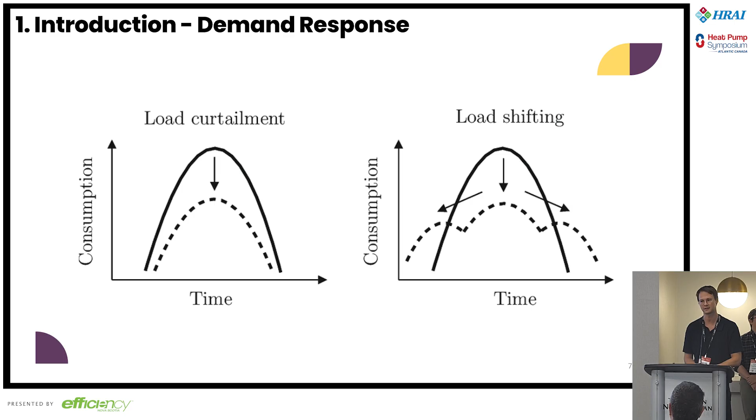So why do we care? There's essentially three key benefits here. So the first is stability of the grid. So by balancing energy supply and demand, it allows essentially the utility to better manage the strain that peak demand applies and manage any sort of power outages. And then as well, the second key benefit is around cost savings. So this is both for the utility as well as the energy user. So essentially, during times of peak demand, it's very expensive for, for example, a utility to install new infrastructure to meet that increasing demand.

And usually through incentives or time-varying rate programs, which we'll go into in just a minute, participants that participate in these demand response programs can receive an incentive and get some cost savings there.

And then finally, in terms of greenhouse gas reduction, many utilities have to rely on fossil fuel power plants to meet these peak demands. So by participating in a demand response program, whether that's industrial, commercial, or residential, we're reducing the reliance on those plants. And as we continue to see increasing electrification, demand response programs are a really effective way to manage that increase in electricity demand on the grid.

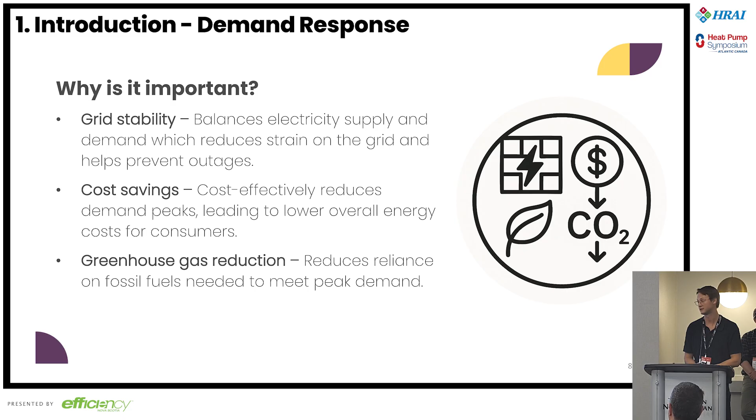So here you can see a pretty typical demand response program timeline in terms of steps. So, an energy user would sign up for a DR program. This could be industrial, commercial, residential. The demand surges, and in our case here in Nova Scotia, we're a winter peaking jurisdiction. So you'd see these peaks in the wintertime, mostly due to heating loads.

Next, your participant would reduce or shift their load, by means of one of the many technologies that we'll demonstrate soon, but essentially you're looking at smart thermostats, EVs, home batteries, and I think that's pretty much it. There might be one more that I'm forgetting.

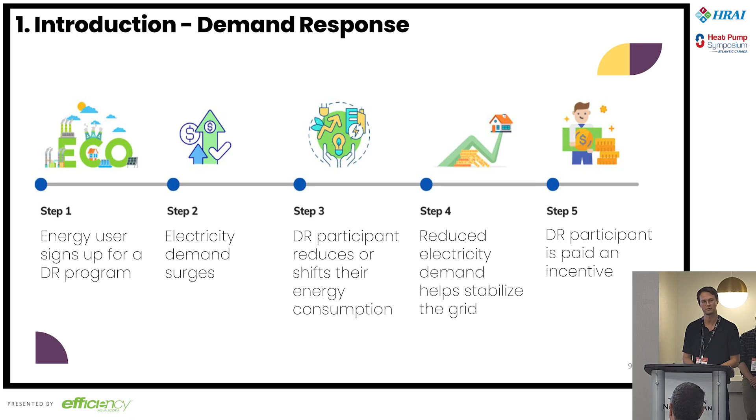And then the next step is you're reducing your electricity demand. These demand response participants are reducing their demand, which helps stabilize the grid. And then finally, your participant gains a profit either through an incentive or donuts or toilet paper in some cases.

So during that time, it's kind of like the stick method in a carrot and stick model where you're penalizing an electricity user for using a lot of demand during that time, but then you get a better rate during the rest of the day and actually in the summertime as well. So that's one type of demand response program.

And then shortly here, we'll dive into EcoShift, which is Efficiency One's demand response program, where a participant would receive an enrollment incentive. So just by signing up a device, they would receive a small incentive. And then again, by participating in the events during the season, they would receive some more money at the end of the season.

So, to give a quick overview of EcoShift, it runs from the beginning of December to the end of February. The events are called by Nova Scotia Power, so they can forecast when that peak demand is coming, and we give the participants a day-ahead notification that this event is coming.

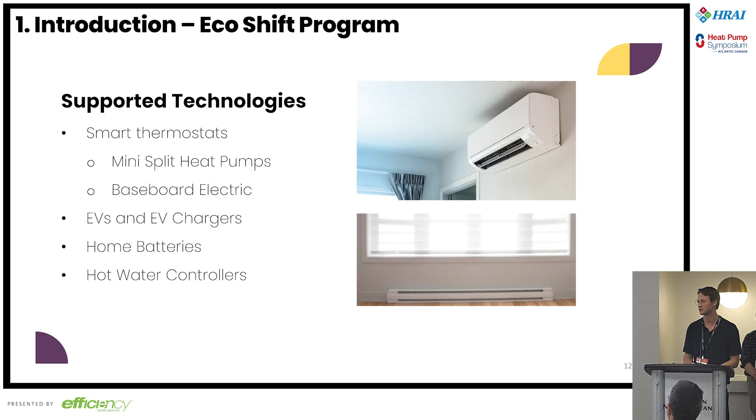So in terms of when a DR event is called, how does the load reduce or shift? How are we performing demand response? There's a few different ways. We'll focus primarily on the smart thermostats here. So to maintain comfort, often we'll do a preheat 30 minutes before the event starts. And then the temperature set point will be reduced by up to 2 degrees Celsius.

For some of these other technologies, you can see, for EVs, you're pausing charging as long as the battery state of charge is above 50%. EV chargers, there's not a lot of those in the program yet, but they basically recharge at a reduced rate. And then for home batteries, you're discharging, usually to the home or potentially back to the grid if it's net metered.

And then for hot water controllers, there's a system where essentially the homeowner won't detect any loss of hot water, and you're essentially curtailing or reducing the power draw during the demand response event.

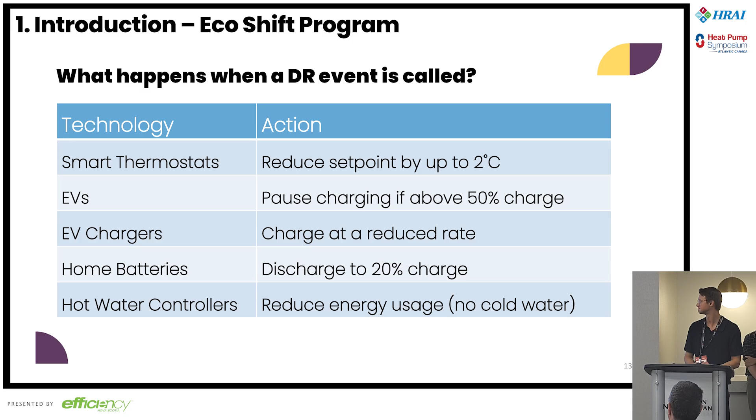So I'll pass it over at this point to Sarah to talk about the high-level outcomes.

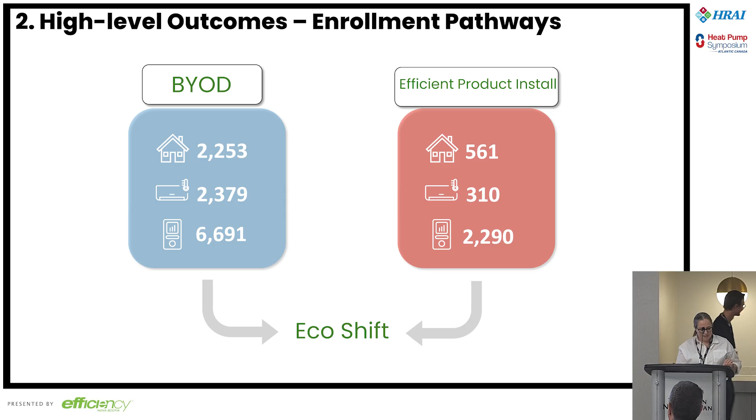Okay, so where do our participants come from? The first thing I want to mention is that these numbers are as of the end of our second season, so that would be the end of February of this year. We have quite a few more devices that have enrolled in the program since then. I think we're at almost 16,000 devices in total. So keep that in mind when we look at the numbers.

There are two different routes that people can join the program. There's the bring your own device path, where people already own those devices. We're talking thermostats specifically right now, but either they own their own devices or they've purchased them recently and they want to enroll the device to take advantage of the incentive that they're getting for enrollment in the program. As of the end of February, participants in that second season, we have around 2,000 people who came in through that bring your own device route. Just the similar count in heat pump controllers and thermostats that were controlling heat pumps, and 6,600 baseboard thermostats.

The other route that people can come in is via the EPI, or Efficient Product Installation Program. That's a program that is also delivered or offered by Efficiency Nova Scotia. For that program, they have been installing thermostats for quite some time for the purposes of EcoShift. As of, I believe, the fall of 2024, they began a requirement that those people who are receiving the heat pump controllers or the baseboard thermostats would also need to enroll in this program.

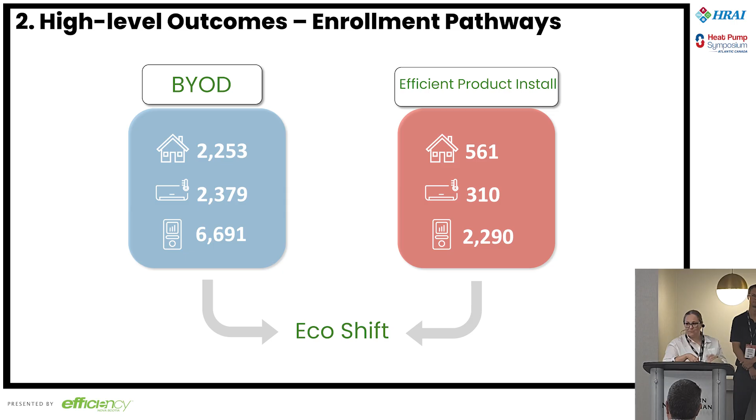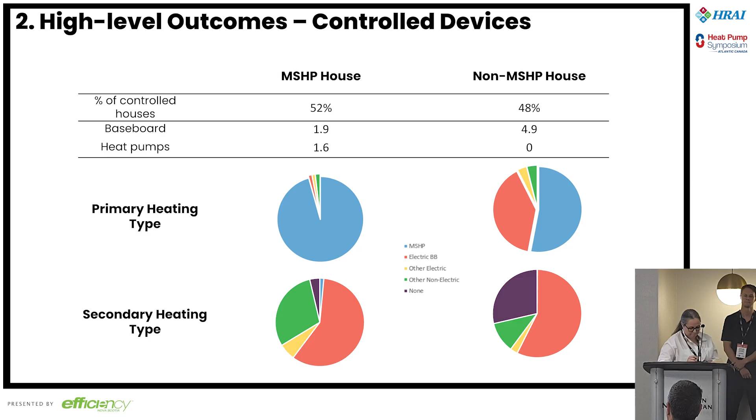All right, I'll pass it over to Ryan. All right.

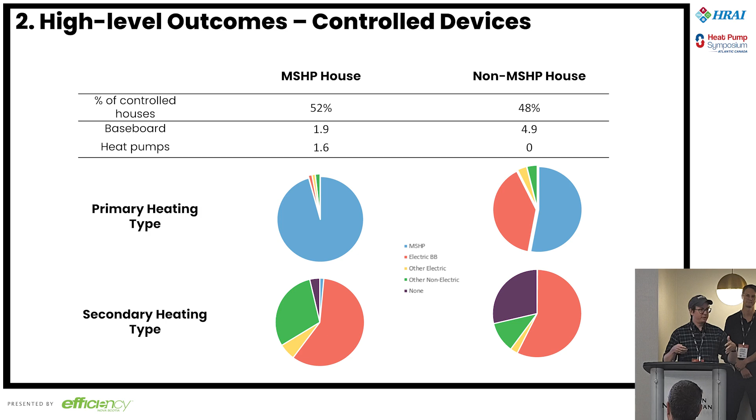So if Sarah gave a high-level overview, literally looking at the province and where everyone is, I want to zoom in, go very low level, pick out a few examples. It's not going to be a statistically representative sample, but I find it's helpful to look under the hood and kind of understand what's going on at that level.

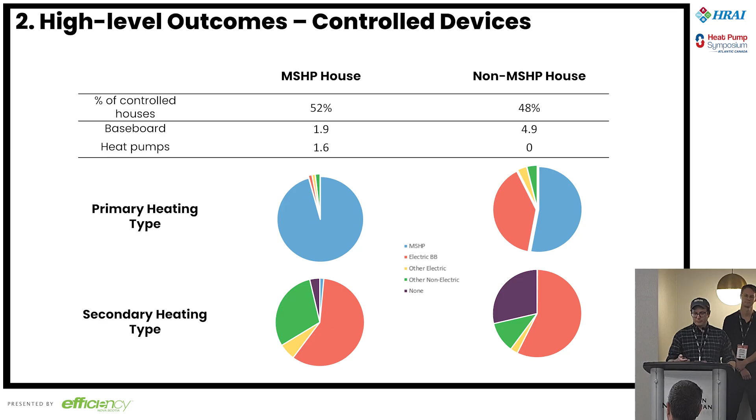So I'm going to focus on a few of the key drivers of those low-level results, and I think these are probably the top three. The first being occupant behavior. So how many people are in the home? Do they like it warm? Do they like it cool? Do they set a thermostat on a schedule? Do they manually change it when they want to?

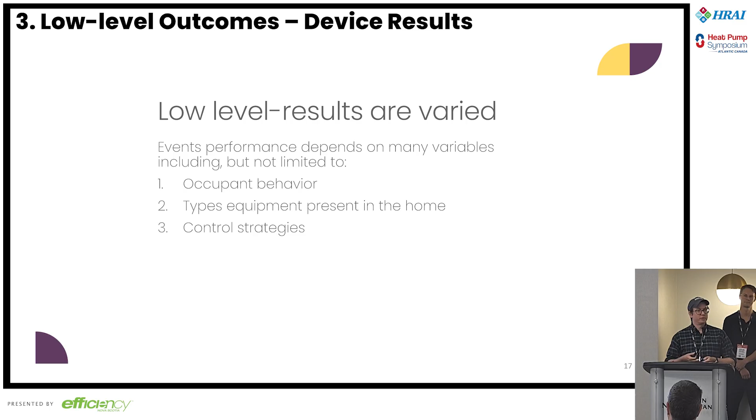The types of equipment present in the home. So you could have a mini split, you could have baseboards, you could have a central heat pump, central oil furnace or boiler, wood stove. You could have all of those things.

And then the third item, control strategies. A lot of homes do have all of those things, and all of those things do not talk to each other. You might have a mini split and baseboards operating on independent thermostats, and so that becomes really relevant when you're talking about coordinating curtailment events in a program like this.

And so I'm going to look through some real data. So we're going to look at meter level interval data. So the electricity meter on the home, 15-minute interval data for a few participating homeowners, fictionalized for the purpose of this presentation. And like I said, this isn't a statistical representation. I've more picked bookends. These are the extremes of what a really good participant looks like and maybe a not so good participant.

So the first one is the Clockwork Cohens. As the name implies, they run their house like a Swiss watch. They follow a strict schedule. They have a thermostat set in every room with a setback while they're away at work. And we know a little bit: when you participate in the EcoShift program, you have to register each individual device. So we know they have two heat pumps. One is in the garage, one is in a secondary suite.

They have 5 baseboards. 2 are in bathrooms, 1 is in a bedroom, 1's in the main entryway, 1's in the living room. They have an electric vehicle, and they're on Nova Scotia Power's CPP rate, which Marlon mentioned earlier. Basically, you get a low rate most of the year, very high rate during these peak events. And these programs dovetail nicely because EcoShift basically automates it for them. They don't have to curtail. All of these devices do it automatically.

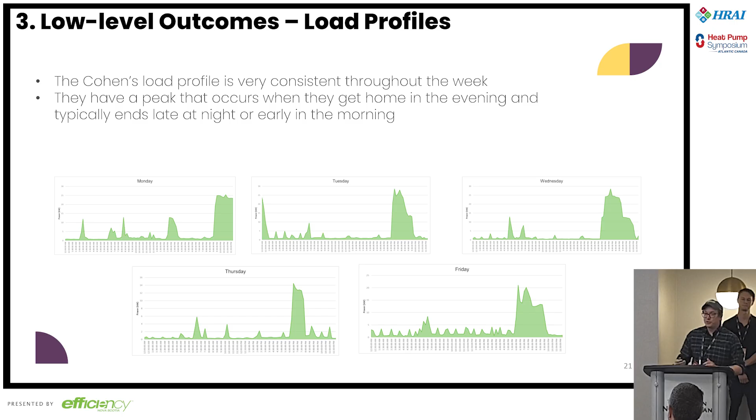And with this house, like I said, they have 5 electric baseboards and 2 mini splits. And they have their thermostats set such that the mini splits are held constant around 21 degrees, and the baseboards are really just backup. I think they had them set at 15 or 16. So the curtailment that you're seeing here is primarily mini splits. You turn them off, they're not active. The baseboards were never active, and you kind of ride out that 4-hour event and then it comes back on.

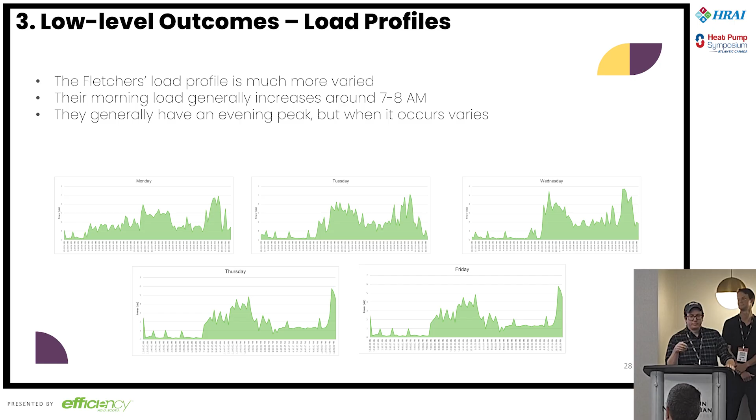Normally, if someone did curtail, you would see a sharp decline. It would flatten out, and then you'd see a peak after the event, which we call the snapback. So it's when your equipment turns back online, and it's usually working harder than it normally would, and you get a bit of a spike at the end there. And I think it was Michael this morning who was talking about unintended consequences. This is a really good example.

Sometimes it doesn't go as you predicted, and we have limited visibility. So we don't know all of the equipment that's in the home. In their case, they had a mini split enrolled, but it could be the case that the mini split was curtailed and they had electric baseboards that came on while it was curtailed. For all we know, they could have been cooking a roast at 7 a.m. It could be some other electric load, but you have limited visibility.

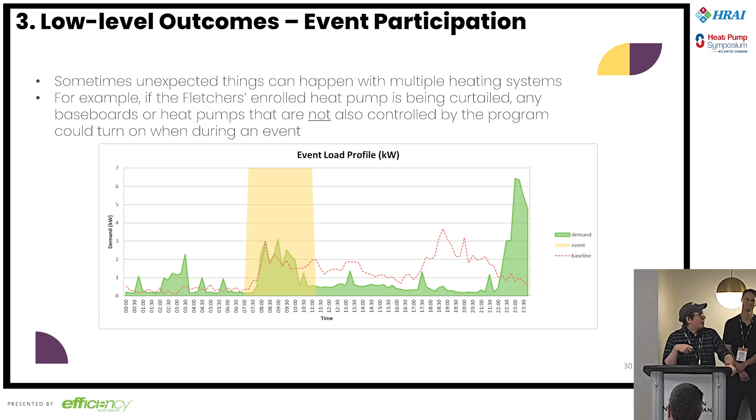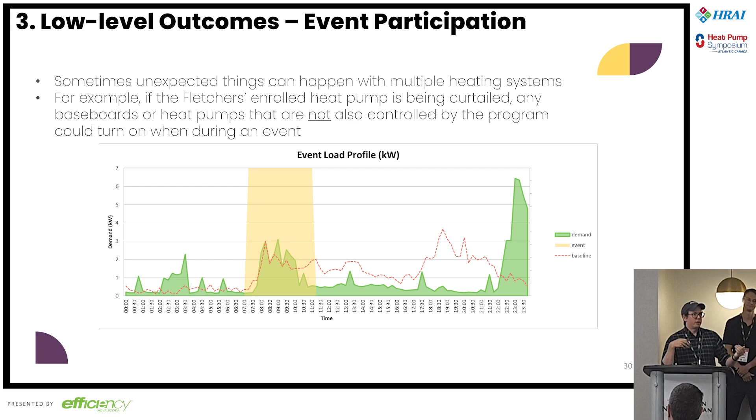And I think Marlon's going to talk to this later, but it becomes more and more important to coordinate the different heating equipment and capture as much of it as possible if you want to maximize that curtailment and not create those unintended consequences where one system goes off and another picks up.

And I'm going to pass it to Joey. Thanks, Ryan.

All right, so I'm going to kick off the section where we discuss the most interesting part, lessons learned. And before doing so, I wanted to add a bit of context for the audience on how we control load when we talk about mini-split heat pumps. So at MYSA, one of the OEMs that Efficiency Nova Scotia works with, we provide not only a smart thermostat that works with high voltage baseboards, we also provide what's called MYSA for mini split heat pumps and AC, which is essentially acting as a smart IR remote controller for those devices. We're compatible with above 85% of the brands in the market, and that's how we let the participants participate in the DR programs.

So the first challenge that we saw in the first season when we did the mini split DR for the first time was supporting users in all sorts of mode settings. Some users like to do heating or simply cooling in the summer, but others who seek more comfort like to set their devices in auto mode. And when we talk about auto mode and controlling a mini split heat pump, it has essentially one set point. And there is a risk that when we trigger an offset for demand response in the winter, it could lower the set point of the auto mode and unintentionally draw more energy by going into active cooling mode, which we didn't want during the DR event. So that was one challenge.

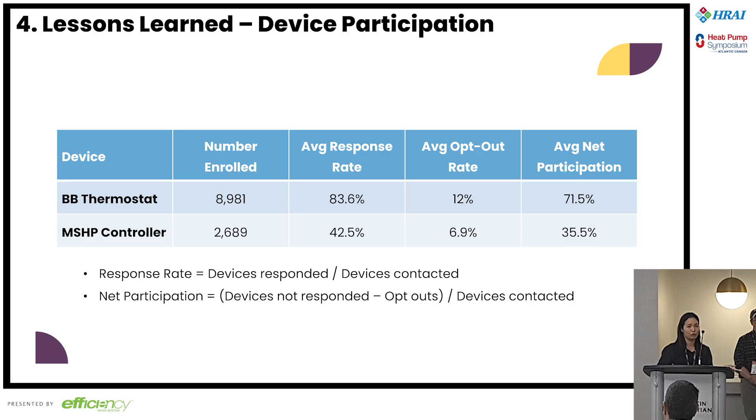So what we came up with at MYSA, we basically wanted to support all modes moving forward, so we implemented on our cloud side where we receive the signal from DR, and then before sending the signal to our users with the devices, what we do is we first check what mode users have before the DR, and then in the beginning, we temporarily switch them to the right heating or cooling mode, depending on the season, and run the DR event and then reset back to the mode that they were initially in.

So this way we don't impact users' preference, but also drive meaningful load shift by honoring all types of modes moving forward. And so we're excited to see the impact of this enhancement, which is live as of last month. So we're ready for the next heating season, and we're eager to report back on the improved participation level. And I'll pass it back to Marlon for the other lessons learned.

So I just wanted to speak a bit to how we drove participation and what worked well. So I mentioned the day ahead notifications. We tried to also give participants a notification right before the event, but found in a lot of cases this created some confusion. So the day ahead, usually I think by 5 p.m., there's a notification that goes out to the DR program participants that lets them know there's an event happening the following day. So that was really successful.

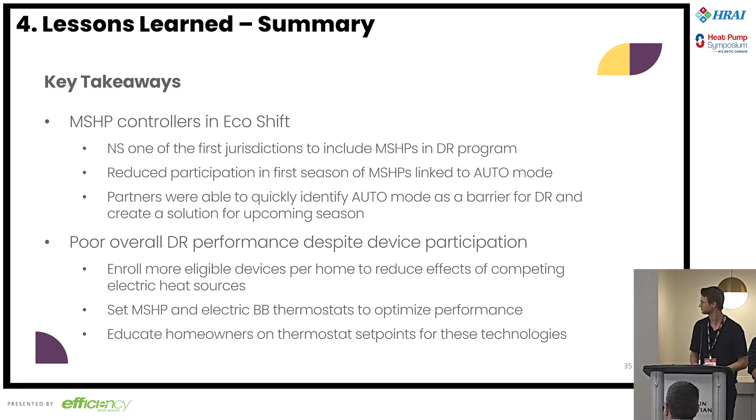So a couple of things we'll leave you with here. We see mini split heat pumps as a huge opportunity in EcoShift, and we'll continue looking to enroll new customers along with our other technologies, of course. I think the auto solution that Joey spoke about will have a large impact on the customers that are already enrolled and are looking to participate again this upcoming season.

And then, a couple questions we would pose to the audience as well: how do we recruit more primary source heat pumps? As Sarah mentioned, there's homes where we don't control the mini split heat pump, but the heat pump is still the primary heat source. So that's an opportunity right there to get those potential customers signed up for EcoShift and start seeing some incentives and some cost savings.

And then finally, and this is sort of a broader issue potentially, how do we optimize dispatch over other heat sources? People have different heat sources in their homes. As Ryan mentioned, it could be an electric boiler, furnace, natural gas, and electric sources as well. It would be nice if there was a perfect solution where you could just say, okay, here's this magic box that's going to optimize all your heat sources and help you save money. But I think in the near term, we'll start to see more control solutions around that, where you're balancing not just pricing, but also making sure the customer maintains the level of comfort that they need.